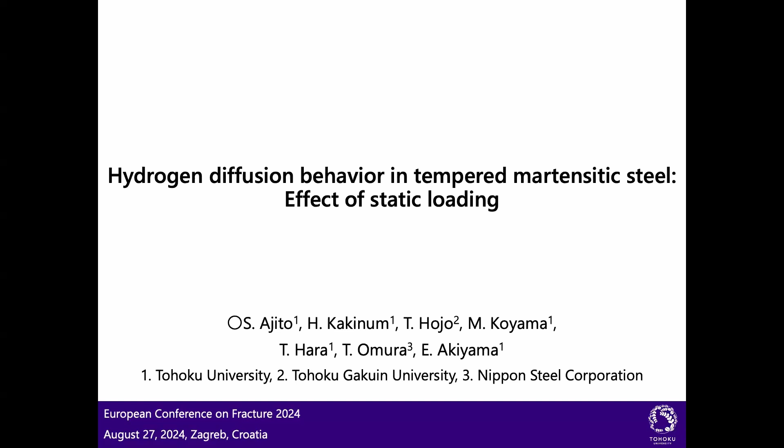Today, I would like to talk to you about our recent research, hydrogen diffusion behavior in tempered martensitic steel, effect of static loading. As you know, hydrogen embrittlement occurs under loading condition. So in order to investigate the hydrogen embrittlement mechanism, it is important to clarify the effect of stress on hydrogen diffusion behavior.

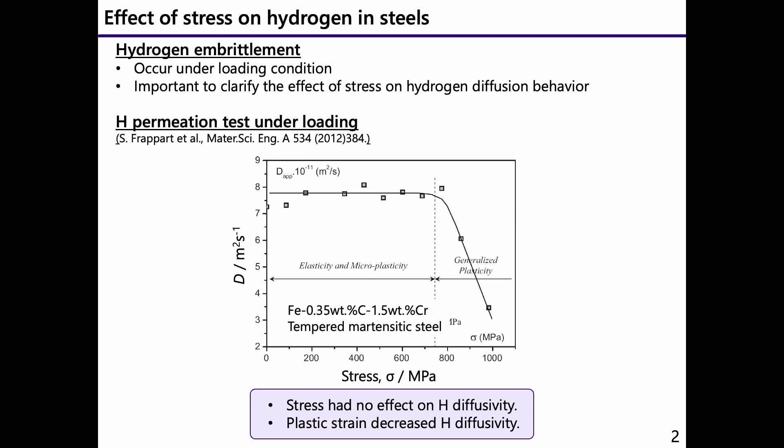However, martensitic steel has a low elastic limit. It means plastic deformation occurs below yield stress. It is called micro yielding. In that case, two possible interpretations can be made for the constant diffusivity under elastic loading. The first interpretation is that both microplastic strain and stress have no effect on diffusivity, so hydrogen diffusivity is constant under elastic loading.

Another interpretation is that microplastic strain may decrease hydrogen diffusivity as general plastic strain does, and stress may increase hydrogen diffusivity, and these effects cancel, so hydrogen diffusivity under elastic loading is constant. In order to clarify the real effect of stress on hydrogen diffusivity, it is required to consider or remove the effect of microplastic strain on hydrogen diffusivity.

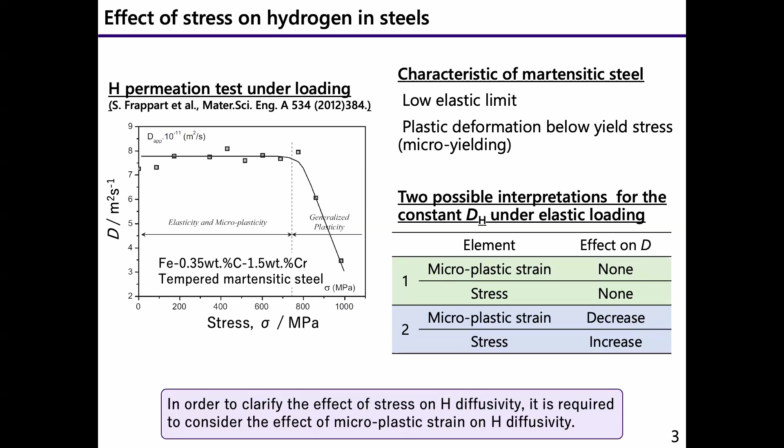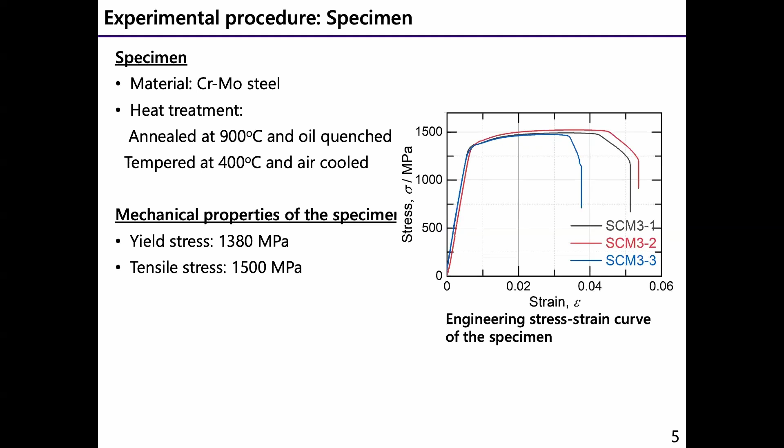For the hydrogen entry side, the working electrode was the specimen. The reference and counter electrodes were the same as the hydrogen detection side. The cell was filled with 0.1 molar sodium hydroxide aqueous solution. The specimen was polarized at -1.2 volt for hydrogen charging. The hydrogen permeation test was 1 cycle per day with 16-hour hydrogen charging and 8-hour hydrogen uncharging. The test was repeated several times with various stress and strain conditions.

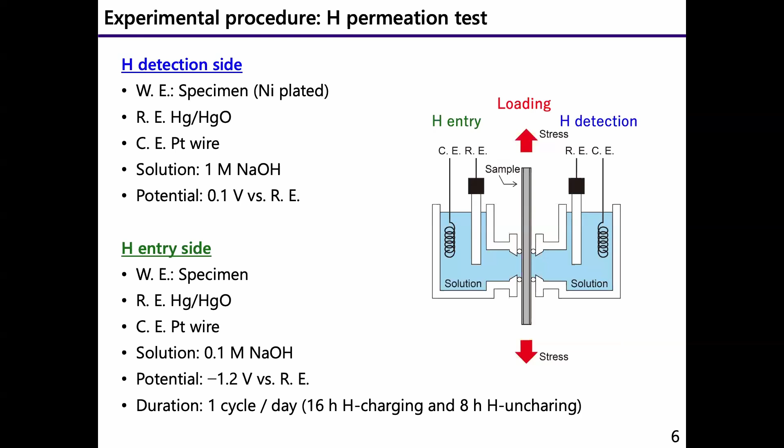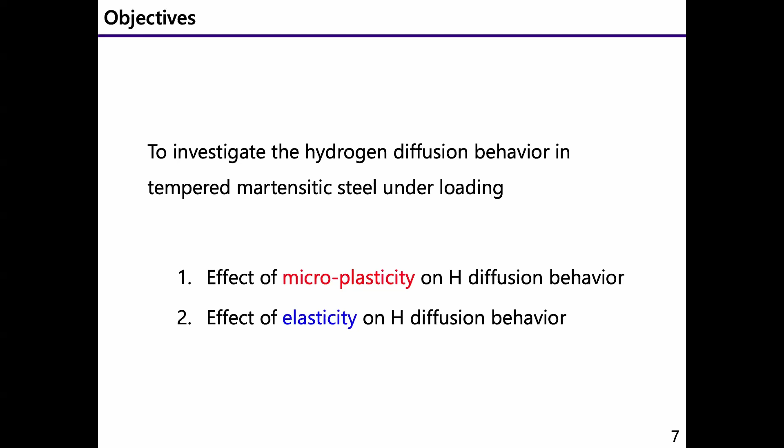Firstly, I would like to explain the result of the effect of microplasticity on hydrogen diffusion behavior. To investigate this, we first introduced microplastic strain in the steel by applying preloading of 500 and 1000 megapascal. The introduced plastic strain was 0.05% at 500 megapascal and 0.07% at 1000 megapascal. Then hydrogen permeation tests were conducted with various microplastic strain and without stress.

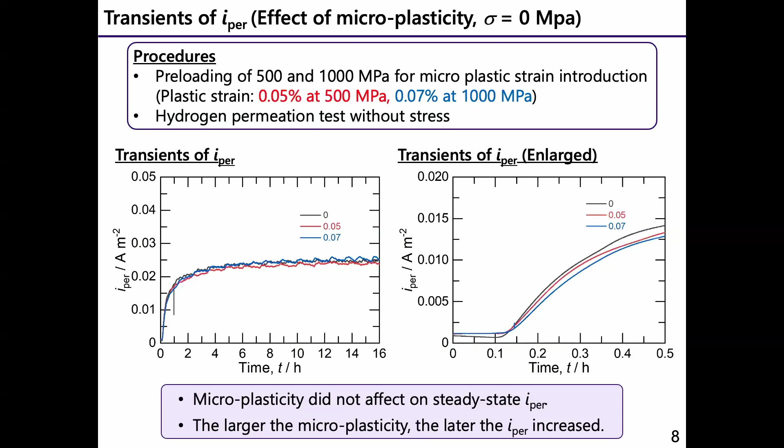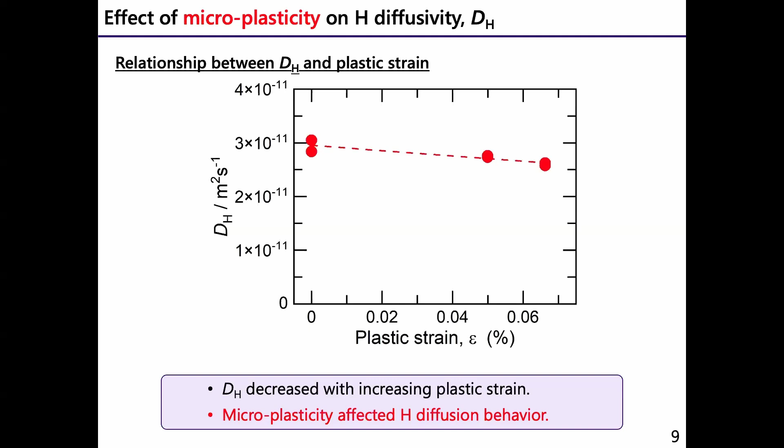Here is a transient of hydrogen permeation current. From the left graph, microplasticity did not affect steady-state hydrogen permeation current. On the other hand, the right graph shows the enlarged one in the initial half hour. You can see that the larger the microplasticity, the later the hydrogen permeation increase. Based on the hydrogen permeation current, we calculated the hydrogen diffusivity, and the relationship between hydrogen diffusivity and plastic strain is shown here. Hydrogen diffusivity decreased with increasing microplastic strain. It means that microplasticity affected hydrogen diffusion behavior.

So far, we investigated the effect of microplasticity on hydrogen diffusion behavior, and we found that microplasticity decreased hydrogen diffusivity. This result indicates that in order to investigate the effect of stress on hydrogen diffusion behavior, it is required to consider or remove the effect of microplastic strain. So we tried to investigate the effect of elasticity on hydrogen diffusion behavior with consideration of microplasticity.

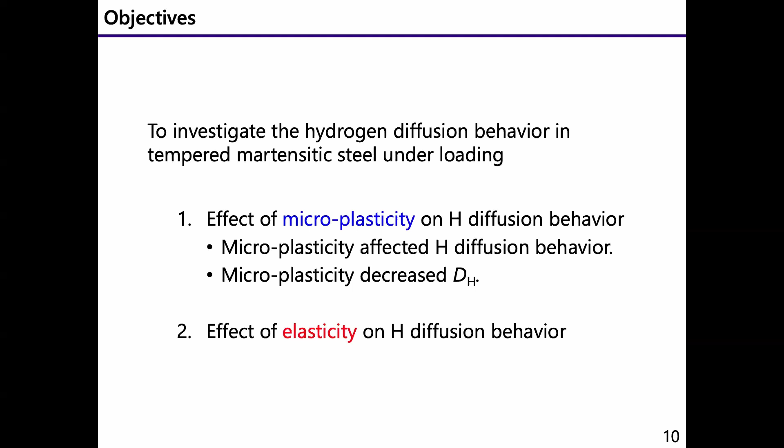To investigate the effect of elasticity, we first introduced microplastic strain by applying preloading at 1000 megapascal. The introduced plastic strain was 0.07%. Then hydrogen permeation tests were conducted with various stress conditions, 1000 megapascal or less, to keep the microplastic strain constant. The left graph shows the transient of the hydrogen permeation current. The greater the loading stress, the larger the steady-state hydrogen permeation current. The right graph shows the enlarged graph in the initial half hour. The greater the loading stress, the faster the hydrogen permeation increase.

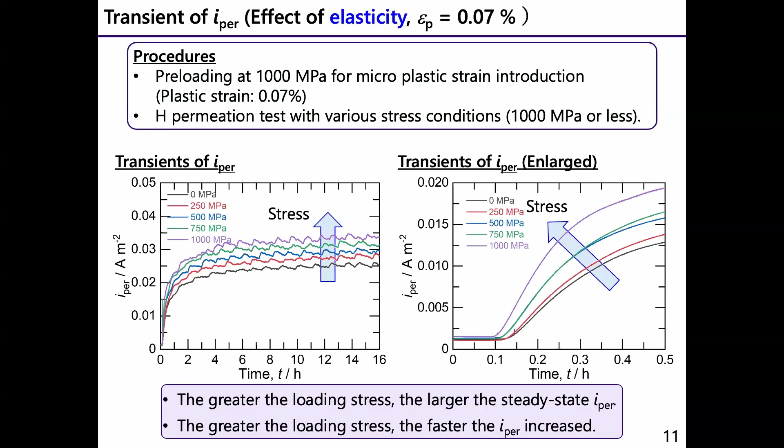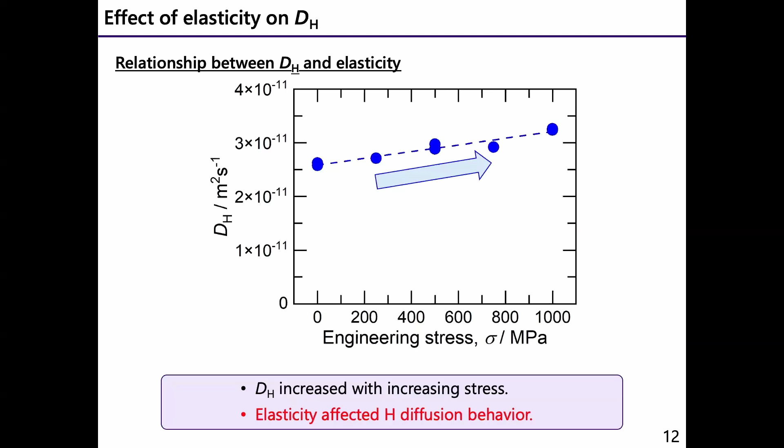Based on the hydrogen permeation current, we also calculated the hydrogen diffusivity, and the relationship between hydrogen diffusivity and elasticity is shown here. Hydrogen diffusivity increased with increasing stress. It means that elasticity affected hydrogen diffusion behavior.

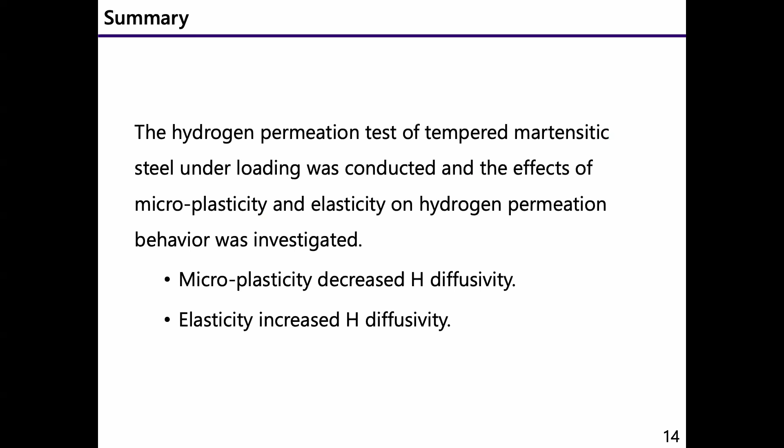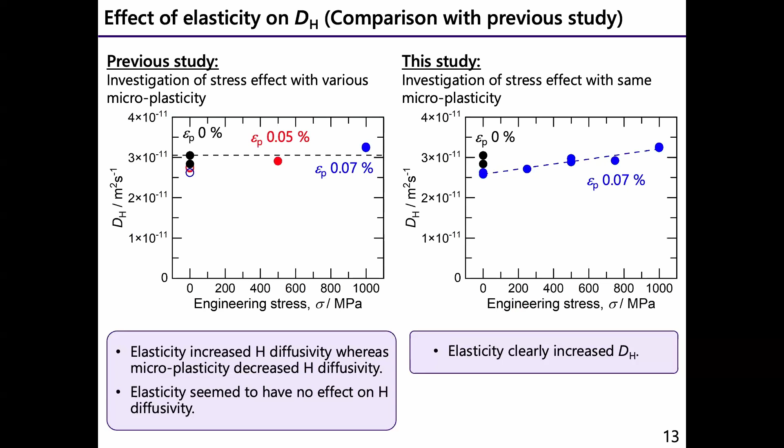Finally, I would like to compare the previous result with our result. Previously, the effect of stress was investigated without consideration of microplasticity. It means that it was investigated with various microplasticity. In that case, elasticity increased hydrogen diffusivity, whereas microplasticity decreased it, resulting in elasticity seeming to have no effect on hydrogen diffusivity. On the other hand, in this study, we investigated the stress effect with the same microplasticity. And we clearly observed that